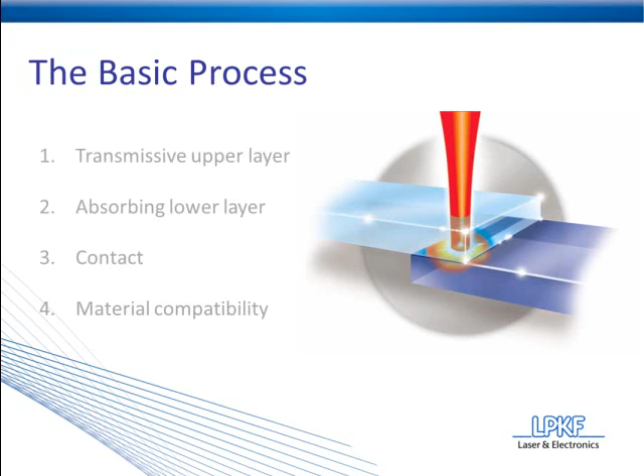Let's move into topic number 1, what is laser plastic welding, and first we'll cover the basic process. The process involves 4 main factors - we like to call these the big 4, and you can see them listed below.

Before I jump into these, I want to give you a quick definition of how laser plastic welding works. The process involves passing laser radiation through an upper transmissive layer down to the surface of a lower absorbing layer. At the surface, where the energy is absorbed, heat is created, and this heat allows the plastic to become molten, and that molten plastic creates a weld.

Let's talk about how each of these 4 factors play into the process. First we have our transmissive upper layer. The main characteristic of this piece of plastic is that it needs to have the ability to transmit laser radiation. When we say transmissive or transparent, keep in mind we're talking about transparent to laser radiation, not optically transparent. This is because laser radiation for laser plastic welding falls into the infrared spectrum, which is outside our visual sight range.

A perfect example to compare the difference between optically transparent and laser transparent is the cover of this gear sensor. Notice the top is completely opaque black, but that's how we see it. Recall, this piece of plastic only needs to be transparent to the laser radiation, not transparent to how we see it. This is achieved by adding very dark red and green dyes, which gives it an opaque look while allowing it to retain its laser transmissive properties.

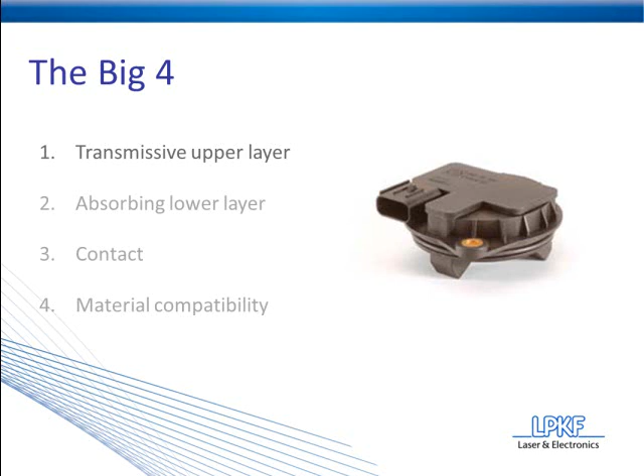So you can achieve different properties of how the laser is going to react to those pieces of plastic based on the types of additives that are used. If you have an application that requires special color coordination, such as in the medical industry, where you need clear-to-clear welds, this is possible using special additives that give the lower layer absorptive properties while allowing it to retain its optical translucency.

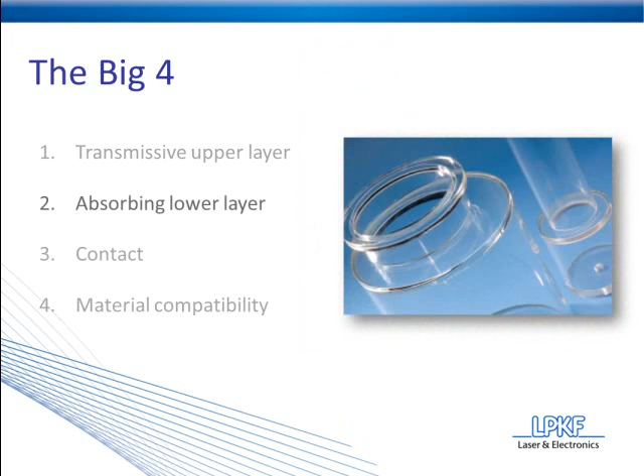That brings us to factor number 3, which is contact between the two joining partners. It does sound relatively obvious that if you're welding two pieces of plastic together that they would need to be in contact, but there is a less conspicuous reason that we bring this up.

Recall that the laser radiation is absorbed by the lower layer, and this absorption creates heat. It's this heat that allows the plastic to become molten and create a weld. The problem is that it's only being absorbed by the lower layer. So in order to get the upper layer to heat and become molten to create a weld, you have to transfer that energy from the lower layer to the upper layer. This is done through conduction, and contact is going to ensure that.

Typically, contact is achieved by building the parts to fit well together naturally. However, to ensure perfect contact, pneumatic clamp tooling will be used throughout the process.

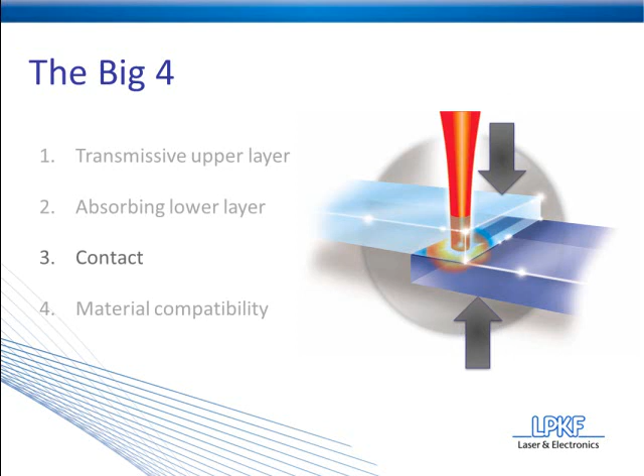The final factor is material compatibility. The two pieces of plastic to be joined need to have similar resin properties as well as similar melting temperatures. If the melt temperatures of the plastics vary too greatly, then one piece of plastic may react very well to the laser radiation, while the other piece is left completely unaffected or actually burning.

If you would like to see a more detailed chart with weld quality as well as more plastics, you can find a copy of that in the back of our design guidelines document, which again, I will give you instructions on how to get a hold of at the end of the presentation.

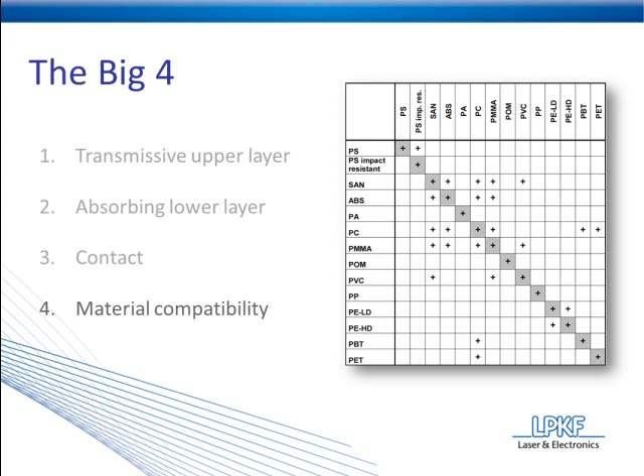So that wraps up topic number 1. Let's move into topics number 2 and number 3. Recall those were how laser plastic welding will address common problems with other plastic joining methods, and to dumb that down, we're going to refer to those as advantages of laser plastic welding. Also, keep a lookout for the applications that will apply to each of those advantages.

Now, here's a quick list of the most common plastic joining methods. We're not going to go into these in detail today. I assume that if you're watching this presentation, you're familiar with these or at least have heard of them by name. We'll just be focusing on laser plastic welding today.

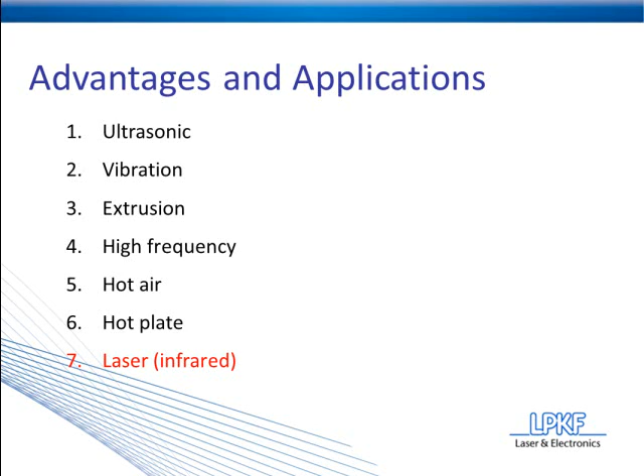Now, just because laser plastic welding is a very flexible process that can work with a lot of applications and has a lot of advantages, that doesn't necessarily suit it to be the best process for your particular application. The way we like to say it is laser plastic welding kind of picks up where the other methods leave off. If you have a very complex application that requires solutions you haven't been able to find with other plastic joining methods, then laser plastic welding may be a great option for you.

All right, so let's move on to topics number 2 and number 3. This is the first of 9 slides you'll see in regards to the advantages that we're going to cover. You can see each of those 9 advantages listed on the left, and notice on the right, you'll see pictures of each of the applications.

Also, as these boxes slide up from the bottom, they'll tell you which of the 3 major industries this particular application falls into. Consumer electronics, medical devices, and automotive are the 3 main industries where you'll find laser plastic welding today. The major focus is really on medical devices and automotive, but consumer electronics is gaining some ground.

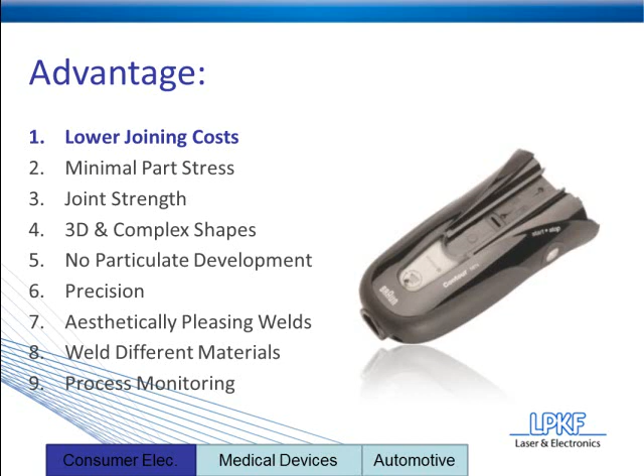So that being said, let's move into our first advantage, which is lowered joining costs. Laser plastic welding has the ability to lower joining costs compared to other plastic methods for a few factors. First off, and probably the most notable, is that there are no consumables involved in the laser plastic welding process. There's no screws, rivets, adhesives, or tapes. When dealing with mass production, anytime you can remove consumables from the equation, you're talking about dropping per-part costs dramatically.

The second factor is minimal system maintenance. Laser plastic welding systems are very robust. They're designed to run 24/7 with very minimal downtime. I believe the only scheduled maintenance is the swap of a water filter on the cooling system for the laser.

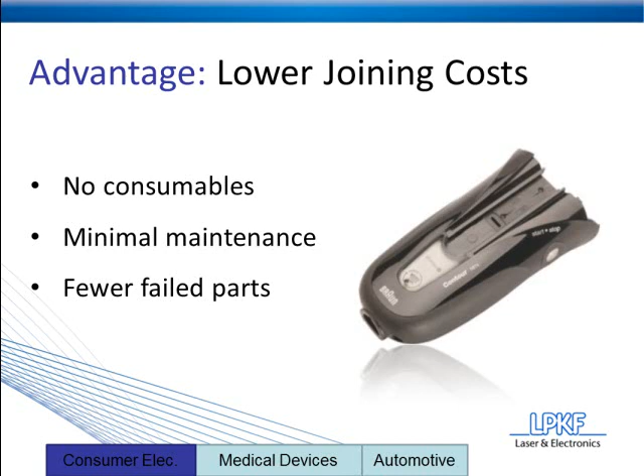Factor number 3 is fewer failed parts. This is due to laser plastic welding's excellent process monitoring and quality controls. I'm not going to go into those right now because I'm going to cover those towards the end of the presentation. So let's move on to advantage number 2, which is minimal part stress.

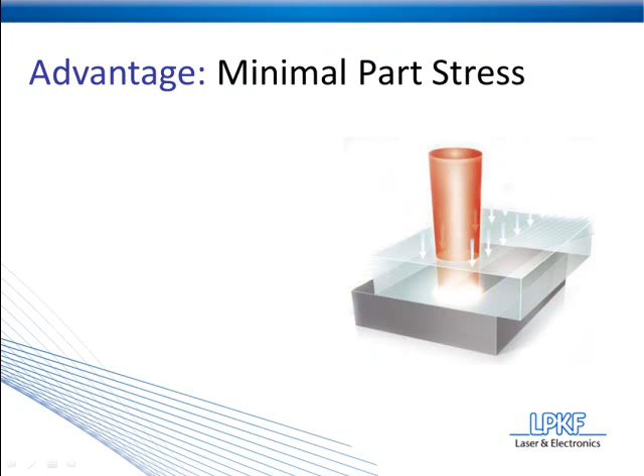Laser plastic welding's main advantage when it comes to reducing part stress is its ability to create localized heat. In engineering terms, you may have heard this referred to as an HAZ, or heat affected zone. In laser plastic welding, it produces a very small heat affected zone.

To contrast the difference between laser plastic welding and other joining methods, take the picture on the right. If those two pieces of plastic were friction welded, they would be rubbed together to create heat, and heat would be created anywhere those two pieces are in contact with each other. The problem is there's a lot of surface contact between those two pieces. What can happen is if too much heat is created, you can damage the plastics, or if there are sensitive components inside, those can be damaged as well.

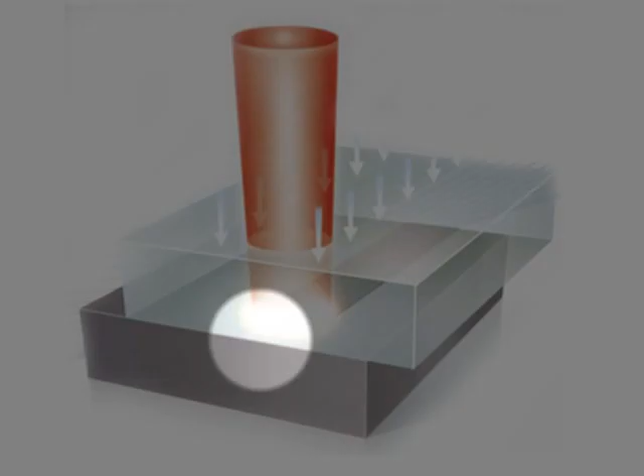With laser plastic welding, all of the heat is localized to only where the laser strikes the plastic. Let me zoom in on the picture. As you can see, this dark area here is the laser travel path. That's the only area that's going to be affected by the heat in laser plastic welding, so excess heat won't be created anywhere outside of that path.

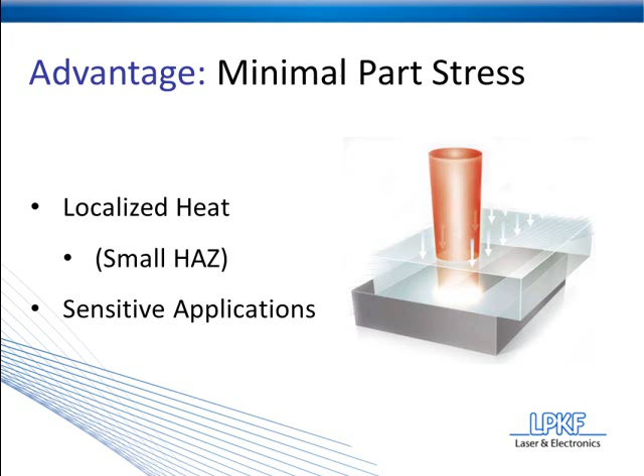This is a huge advantage when you're dealing with sensitive applications, for a couple of reasons. First, by reducing part stress, you're going to reduce the amount of failed parts you create, and you're going to save money. Secondly, by minimizing part stress, laser plastic welding is really opening doors for new and smaller applications. So let's move on to our third advantage, which is joint strength.

As the automotive industry moves towards placing more and more electronics within their vehicles, the demand for robust electronics is becoming more and more prevalent. As we talked about on the last slide, electronic devices tend to be sensitive. However, in the automotive industry, durability and wear are huge factors with any part that goes into a car. So having the ability to produce strong joints, even in the most sensitive applications, is becoming not only an advantage, but a requirement in the automotive industry.

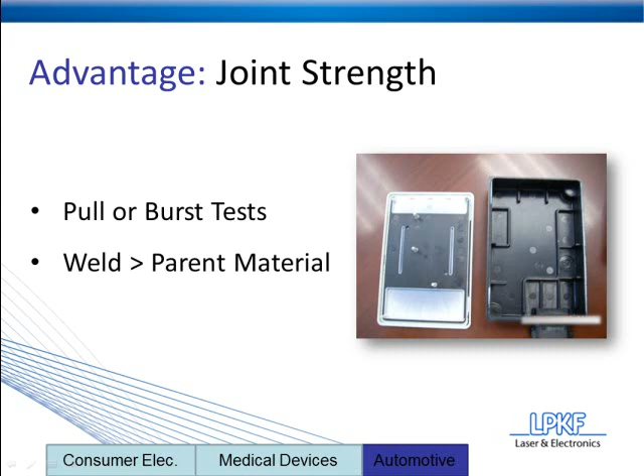The purpose of this slide is to prove that laser plastic welding can produce very strong joints. To do this, we use what's called a pull or burst test. In this particular instance, a pull test was used, and what we're trying to determine is whether the weld is weaker than, as strong as, or stronger than the parent material. In laser plastic welding, you'll find that most of the time the weld will actually be stronger than the parent material. However, let's zoom in and find out for ourselves.

In this application, you can see this white part is a lid that originally sat on top of this housing, and the joint would be all along the edges. What we're looking for here is material transfer. You can see black transfer here and some in the corner, and on the housing you can see white transfer here, here, and all along this edge. That tells us that as these two pieces were broken apart, the breakage occurred not in the weld, but in the parent material, and some of that material was left on each of the two pieces of plastic.

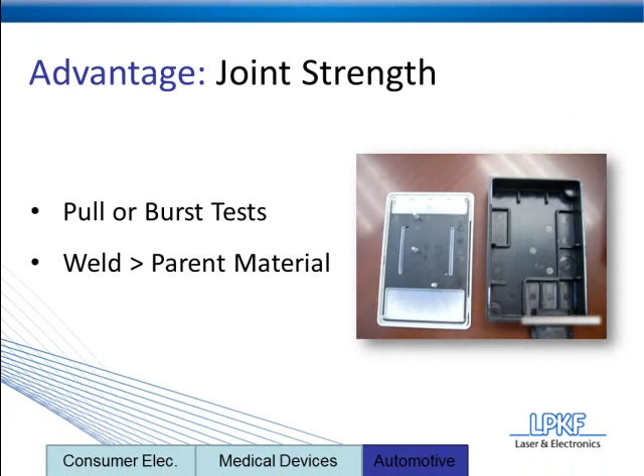So in this case, laser plastic welding did indeed live up to its name and create a very strong weld.

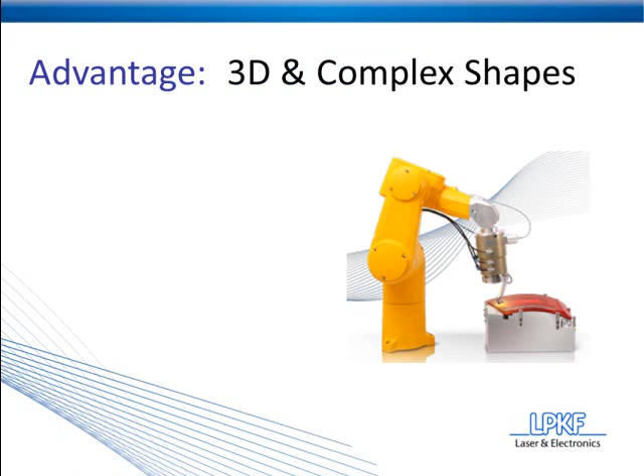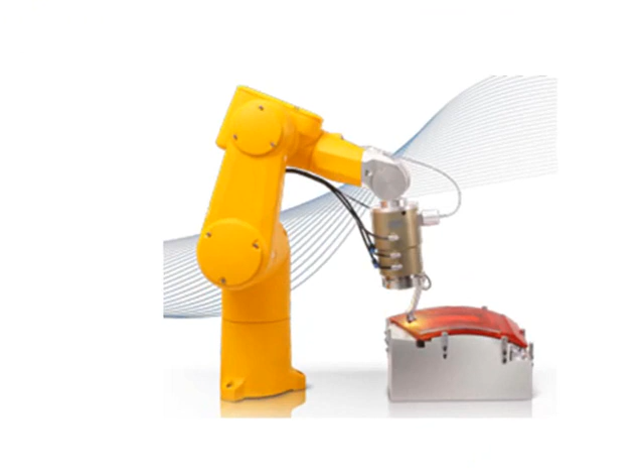Let's move on to advantage number 4: laser plastic welding's ability to weld 3D and complex shapes. The application you see here is a taillight, again in the automotive industry. Notice the curvature of this taillight. Let me zoom in and trace out where the weld would take place, around all the edges. As you can see, the curves are far from simple, with double curves involved and deep height changes.

If you were to weld this with friction welding, the height changes would create pinch points, generating more energy at certain spots than others, resulting in a very inconsistent weld. However, with laser plastic welding, due to localized heat, heat is placed only where it's needed, so it's very consistent.

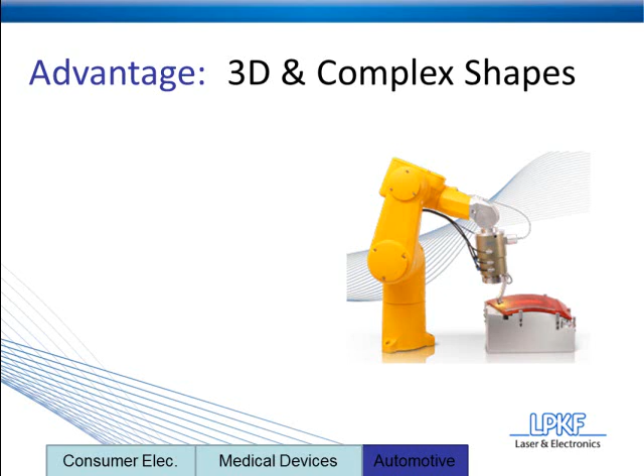This particular application also takes advantage of the TwinWeld 3D, a robotic arm-assisted laser source. The advantage it gives is that it's able to move the laser source relative to the joint. So any height changes in the application due to curves are a non-issue, because the laser source is moving relative to that height.

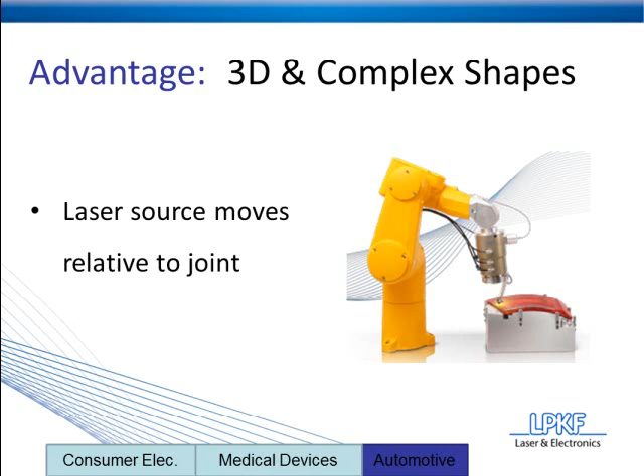There's also one more thing about the TwinWeld 3D system that fits well with 3D and complex shapes: a proprietary technology that uses halogen heat radiation in addition to the laser radiation. There are two clear advantages. First, the halogen heat sources will soften and anneal the plastic. When dealing with 3D and complex shapes, it's tougher to get a nice fit between the two parts, but if the plastic is softer, it tends to fit better together.

The second advantage is that the halogen lamps are essentially preheating the plastic around the laser. So the laser won't have to work as hard, or take as long, to melt the plastic and create a weld seam, and this can reduce cycle times by up to half.

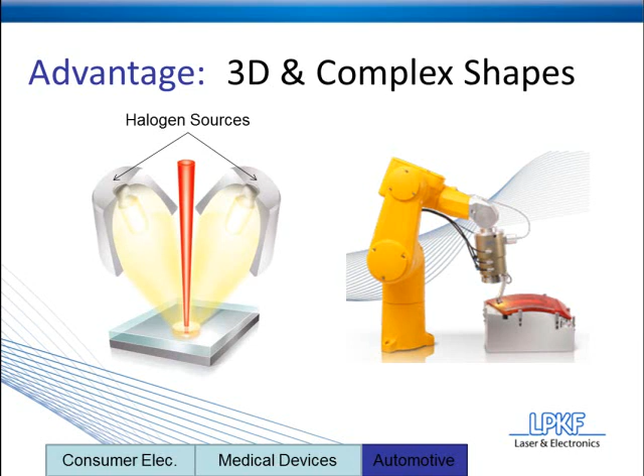Let's move on to advantage number 5, which is laser plastic welding's ability to leave no particulates behind. Particulate development has become a big issue in both the medical and automotive electronics industries, since particulates left behind from the manufacturing process can potentially contaminate the application.

In this particular application, you see a microfluidic device with very small channels. Tiny amounts of fluid pass through those, and even the smallest particulate could contaminate the desired results for this device. In the automotive industry, you're seeing devices that have circuit boards in them. Particulates can get into those circuit boards and gum them up, making them obsolete. So particulates result in more failed parts during the manufacturing process.

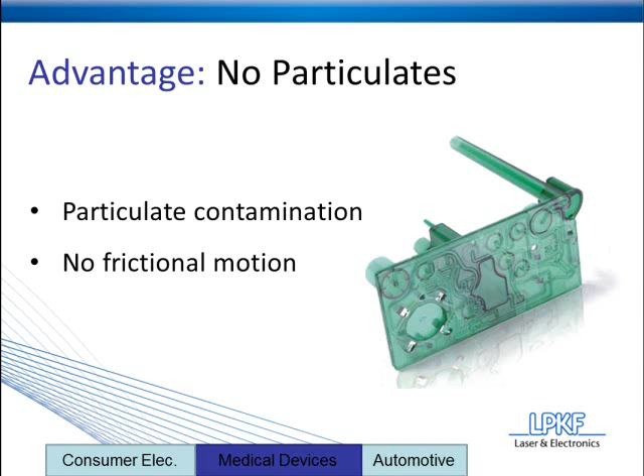The reason laser plastic welding does not leave particulates is because during the process there's no frictional motion. Unlike ultrasonic welding or friction welding, the parts aren't being rubbed together. Anytime you rub two pieces of plastic together, you get a scaling effect or particulates developed.

This can be seen in this example, where you have a laser plastic welded joint on the left and a friction welded joint on the right. Notice the difference in cleanliness from the laser plastic welding joint compared to the scales and particulates left behind from the friction welded joint.

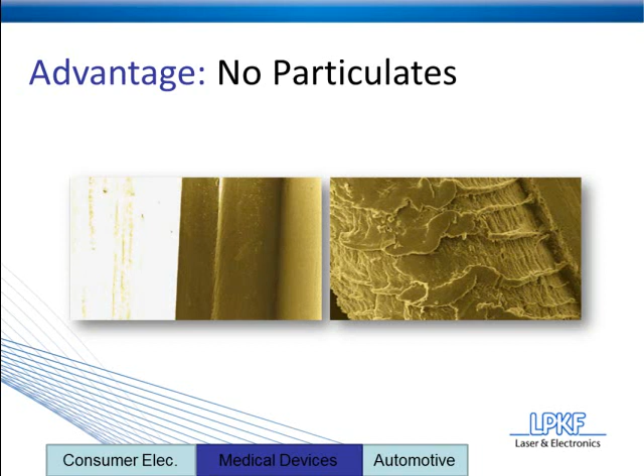Let's move on to advantage number 6, which is precision. Laser plastic welding has the ability to create welds in the less than millimeter range. What this means is that devices such as these below were basically made possible by laser plastic welding.

The device on the left is a microfluidic device. Something to note is that it's no larger than your cell phone, about 3.5 inches long by 2 inches wide, and there are 2 full meters, or 6.5 feet, of weld seams within that very small device. On the right, you have a microatomizer, and based on the fact that it's sitting on top of a finger, you can see that it's about a dime-sized device.

So what this means is that as the medical and electronics industries look to innovate smaller and smaller devices, more precise joining methods are going to be required to actually assemble those pieces. Laser plastic welding is really on the forefront, opening up a lot of doors for those smaller, more innovative devices.

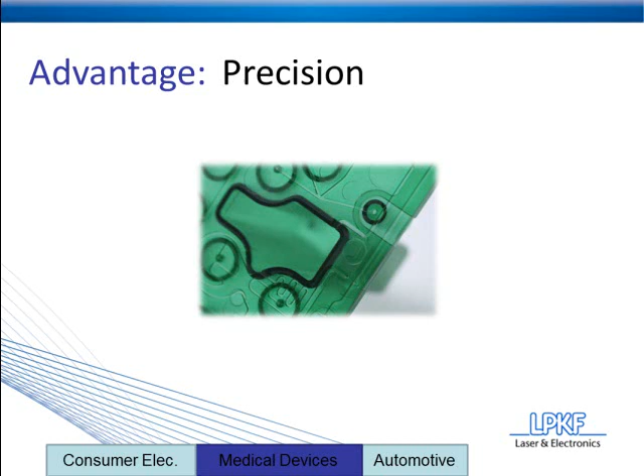Advantage number 7 is probably the most flashy advantage, and it is aesthetically pleasing weld seams.

Now, aesthetically pleasing weld seams is kind of just icing on the cake. So where this advantage really comes into play is where it synergizes with the other advantages that we talked about. No longer do you have to sacrifice quality of the function in order to get quality of the form. You can have a good looking part with very high quality function.

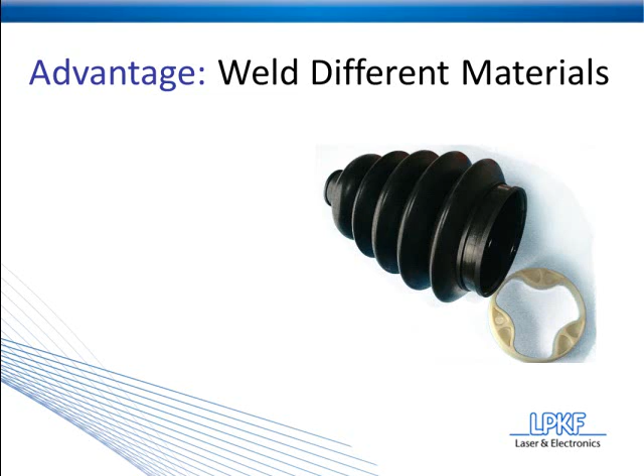Moving on to advantage number 8, we have the ability to weld different materials. We talked briefly a little earlier about material compatibility and welding different types of plastics to one another. What we're really trying to get across here is the ability to weld hard to soft.

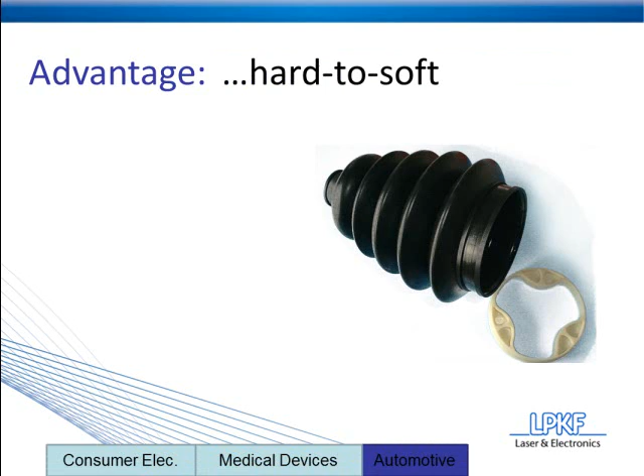This is a CV boot for a car. It's essentially a joint, and the black piece of plastic you see there is flexible, and the white piece will be welded inside of that. Also, along the same principles, laser plastic welding has the ability to weld soft to soft materials.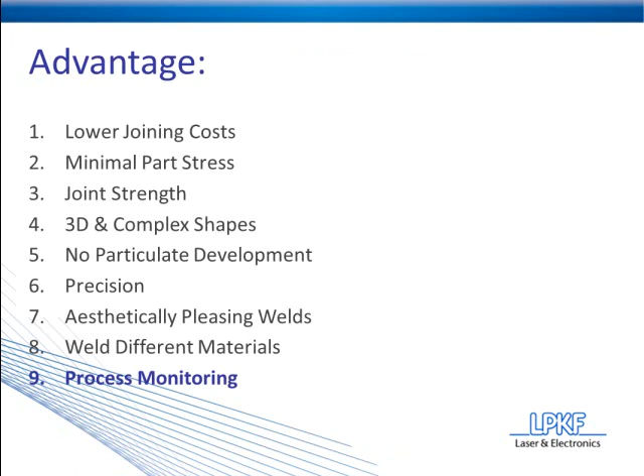That brings us to our 9th and final advantage, which is process monitoring. Process monitoring gives you the ability to have a high level of quality assurance. Due to laser plastic welding's nature, there are multiple process monitoring techniques that can be taken advantage of, and we're going to go through 4 of those today.

The first technique we're going to talk about is melt travel monitoring, and there are 2 aspects to melt travel monitoring: the path, or what we call the melt travel or melt collapse, and then time. Essentially, as the 2 parts are heated up and compressed together, the melt travel is the amount of compression that takes place. During testing, you'll determine the amount of melt collapse that's required to get a good quality weld. You'll also determine the amount of time that should be required to take place.

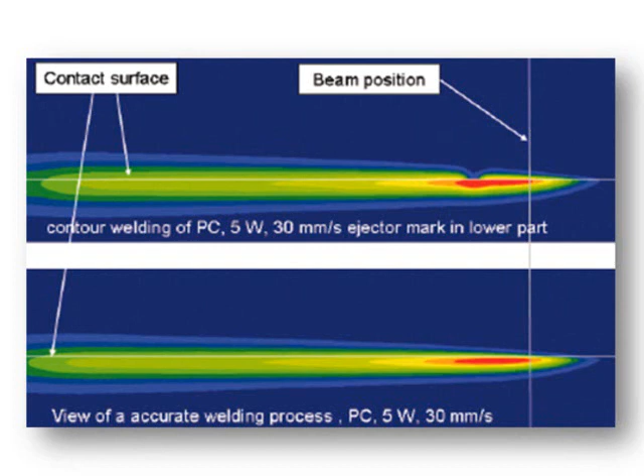Process monitoring technique number 2 is pyrometer measurement, and pyrometers are essentially going to measure the heat that's reflected off the surface of the component. Let me zoom in here on this picture. The heat map on top differs from the heat map on bottom based on this small gap right here. Now, what this gap is going to indicate to us is that this part in particular lost heat at this point, and we want to know that because we want to determine if that's a defect in the part, or if it's going to be something that's consistent throughout the entire manufacturing process.

The third process monitoring technique is reflection diagnosis. As laser energy strikes the plastic, some of it's going to be reflected, some of it's going to be absorbed, and some of it's going to be scattered. The reflection diagnosis technique is looking at measuring the amount of reflected light from the surface of the application. The simplest way to explain this is that as light strikes the surface, it's going to reflect a certain amount of light.

Now, if there's a gap between the two plastics, as you can see in the example on the right, then more reflection is going to happen at that point.

Now, as the two pieces of plastic are welded together, as you can see in the example on the left, less light is going to reflect off of the interface of the surface. The reflection diagnosis system will measure this, and it will determine if too much light is being reflected, then it can let you know if there's a gap between the two pieces of plastic.

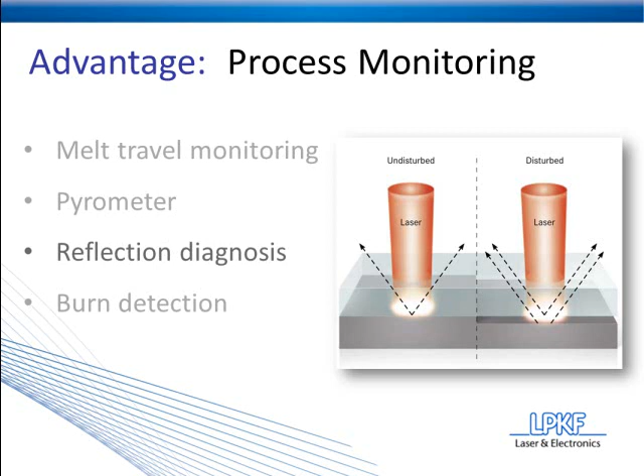So the fourth and final technique is burn detection. What you would like to see throughout an entire process is a very consistent heat all along the weld seam. Burn detection is going to measure the amount of heat coming off of the surface of the plastic, and anytime you see a heat spike, it's going to let you know that a burn probably took place.

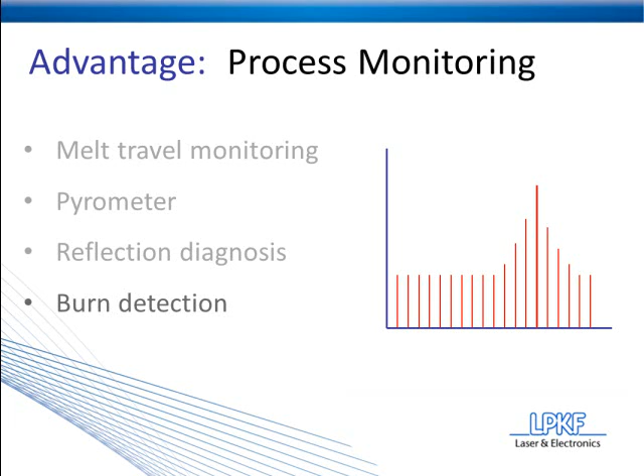Now, you don't want to have contaminants inside the plastic, because if the laser is striking the contaminant and not the plastic, then you can get a cold spot or a heat shadow, and a weld won't be created along that point. And so that wraps up our ninth and final advantage, as well as topics number 2 and number 3. But before I conclude the webinar, I'd like to cover just a few disadvantages of laser plastic welding. So let's jump right into those.

First off, and probably the most apparent, is the initial capital investment of laser plastic welding systems. Compared to other plastic joining methods, the systems are significantly more expensive, and this is often the largest barrier to a company actually taking on laser plastic welding as their joining solution.

However, do keep in mind that laser plastic welding has a very low total cost of ownership. Recall what we talked about previously. There are no consumables involved in the process, very minimal system maintenance, and fewer failed parts due to the excellent quality assurance.

Disadvantage number 2 is part geometry limitations. Now, every joining method is going to have their own limitations. Laser plastic welding has a few, and the most obvious is the transmissive layer thickness. We recommend a transmissive layer thickness of no more than 3 millimeters. And the reason why is because anything thicker than that, and you're going to have a tough time transmitting enough laser energy to the weld interface to create the adequate heat for a quality melt.

Now, there are a couple other part geometry limitations. They're a little more advanced, so we're not going to cover them here. If you'd like more information on those, again, you can get them from the design guidelines document that I will be introducing to you here in a minute.

Disadvantage number 3 is that the plastics must be optically suited. You do have to have one piece of plastic that is transmissive to laser light and one piece that is absorptive. So this does provide some limitations when you're trying to deal with certain types of plastic or certain colors of plastic. If you're very specific on the colors of your application, then this can provide certain limitations. However, do keep in mind that you are able to generate most color combinations using additives, colors, dyes, or as you saw, the clear-to-clear additive that we talked about.